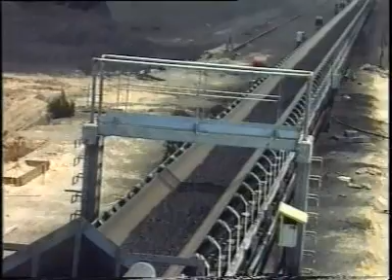Global pollution related to the production, transportation, and burning of fossil and nuclear fuels is destroying the world's ecological balance. CO2, SO2, and other pollutants caused by the burning of fossil fuels, such as oil, gas, and coal, are the primary causes of acid rain production and global warming.

Estimates show that by the year 2010, the global demand for electric energy will increase by more than 25%. Unless a new non-polluting energy source is developed, this huge global demand will be met by the construction of additional fossil fuel and nuclear power plants, which will further pollute and endanger the planet.

Here at the Technion, Israel's Institute of Technology for Teaching, Research and Development, which is the Israeli equivalent to MIT, a select team of scientists headed by Professor Dan Zaslavsky, former chief scientist of the Israeli Ministry of Energy and former water commissioner for the State of Israel, has developed a revolutionary solution that will meet the world demands for future electrical power with a new, non-polluting energy resource. The solution, which can produce power on a massive scale, is called the Energy Towers.

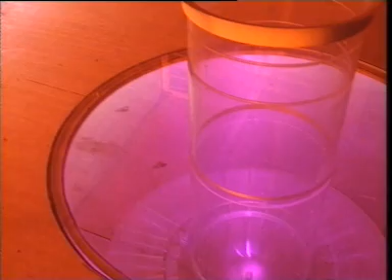The idea for this new power source was first introduced in the early 1970s in a patent by Dr. Philip Carlson, a US physicist. Seeing the tremendous potential of this new idea, the Technion team worked many years developing the technology. The Energy Towers concept that emerged from the Technion research is to build a non-polluting power plant that produces electricity in large quantities and at a low price, utilizing virtually unlimited fuel: hot, dry air, and seawater.

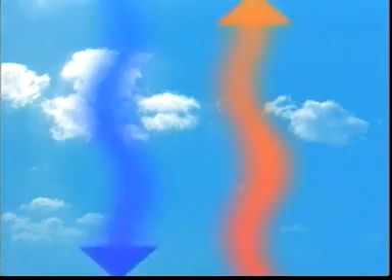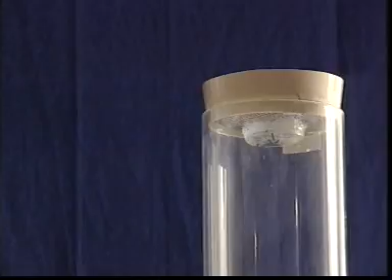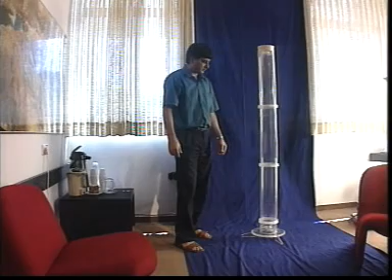The Energy Towers concept is based on a very well-known physical principle in which hot air rises and cold air falls. To demonstrate this principle, we use a small tube and put dry ice at its top. In this model, the dry ice cools the air. The cold air descends and rotates a small propeller at the bottom of this tube. In the Energy Towers, seawater cools the hot, dry air, and the cold air falls and rotates turbines.

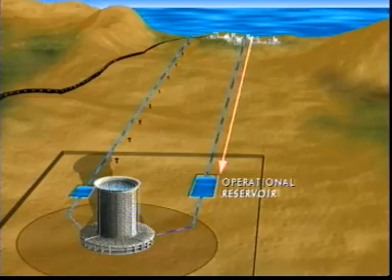The Energy Towers will be located in a hot, dry area near a large water source, such as an ocean or a sea. The seawater is delivered by pipes or canal to the operational reservoir, and then pumped to the top of the tower. There, the water is sprayed in small droplets by a spraying system into the hot, dry air, evaporating and cooling the air. As the air cools, it falls and gains high velocity.

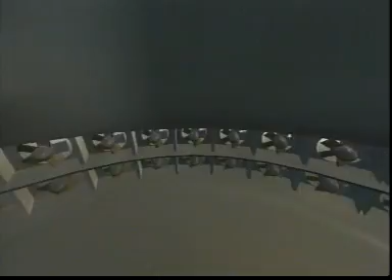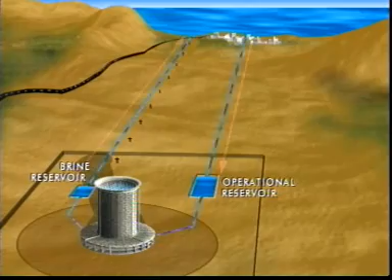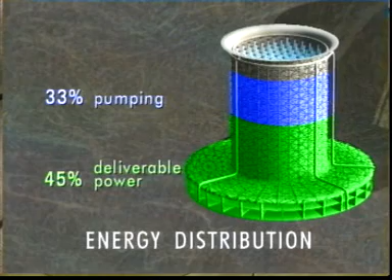The wind speed can reach 50 miles or 80 kilometers per hour, rotating turbines located at the bottom of the tower and producing electricity. The brine residue is collected and stored in the brine reservoir, and from there it is conveyed by pipe back to the sea. 45% of the energy produced in this process is deliverable as electrical power. 33% is used for water pumping to the top of the tower, and the remaining 22% are energy losses.

Such an energy tower can provide a city of around 1 million residents with all its electricity needs, which is equivalent to 460 megawatts average annual production. To achieve this energy production, the energy tower dimensions must be approximately 1,200 meters in height and 400 meters in diameter. The reason for building the energy tower plant so high is that the production of net deliverable power increases significantly as the tower height increases.

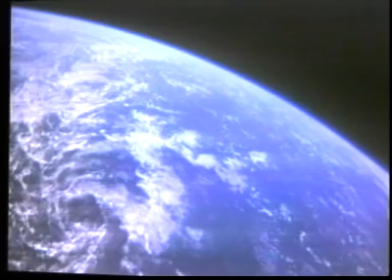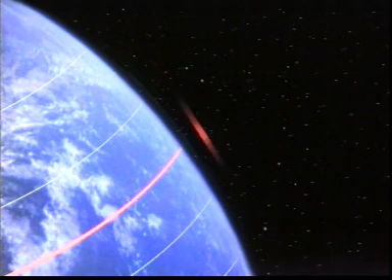The principle behind the energy towers is to exploit a well-known global meteorological phenomenon called the Hadley cell circulation. The Hadley cell circulation is a natural huge heat machine that transfers energy from the equator to the desert areas of the world. The circulation begins when hot, humid air rises from the equator. As it ascends, it becomes cool and dry by shedding rain. This dry air later travels north and south and descends towards two belts.

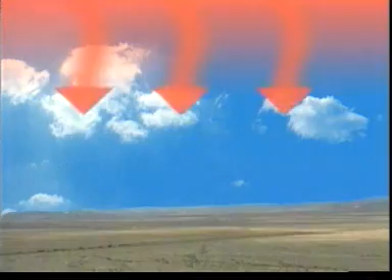As it descends towards the ground, it is compressed and becomes very hot and dry. This is how the Earth's large deserts and arid regions are created. This air flows back towards the equator, and the process repeats itself. The Energy Towers operation is based on harvesting this hot, dry air as it descends above the desert regions. It flows day and night, and thus allows the Energy Towers to operate continuously, unlike all other solar energy facilities that produce energy only during sunshine hours.

In comparison to tall building structures existing today around the world, such as the Sears Tower in Chicago and the Twin Towers in New York, the Energy Tower's height will be more than twice the height of these structures. The Energy Towers project in its entirety is based on well-known, proven existing technologies.

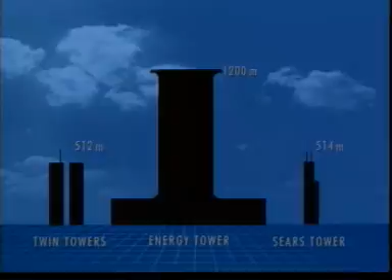The government of Israel was deeply impressed by the prospect of this project. It formed a committee of experts to examine the project, and their verdict was that this project can be built entirely from well-known, proven existing technologies, and it encouraged the government to support this project to fruition.

The committee was convinced of the qualitative correctness of the physics on which the Energy Towers idea is based. An advanced analysis by Professor Yair Tena reflects a reasonable initial cost, though somewhat higher than estimated by Zaslavsky's team. The analysis points out clear economical advantages to the Energy Towers program.

The Israeli Electric Corporation, the national electric utility that supplies all Israel's electric needs, saw it as a revolutionary, innovative idea.

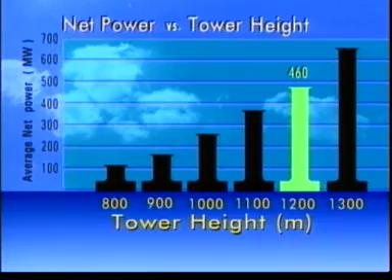The output calculations were examined and confirmed by several independent groups of experts, among them the Computational Fluid Dynamics Software Limited Corporation and the Israeli Electric Corporation. The calculations regarding the average net output of 460 megawatts, with its corresponding 400-meter diameter and 1.2-kilometer height, are the results of extensive research, tests, and simulations made by the development team at the Technion.

We calculated the output in many ways, probably 6 different ways. And we were not satisfied until we got the same results in all of them. And it wasn't done only by us, it was done by different people using different methods, and we made a point of it that over a range of parameters, all of us will get the same results.

But that's not enough. We ran experiments. We had wind tunnel models, and we had also a 5-story building chimney where we could run experiments, and we actually ran hundreds of experiments. And we can say in certainty today that we didn't forget to divide by 2 or multiply by 7. Our accuracy today is probably plus minus 10% in estimating the output. And there's absolute certainty about it.

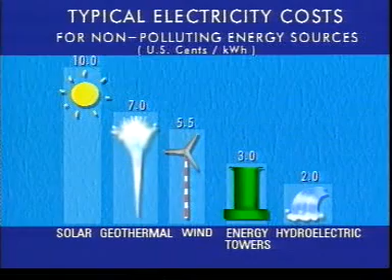In comparison to other non-polluting energy sources such as solar, geothermal, wind, and hydroelectric power, the Energy Tower is only slightly more expensive than hydroelectric power and far less costly than wind, geothermal, and solar power. One must remember that the Energy Tower's global potential far exceeds the combined output projections for all the other forms of non-polluting energy production.

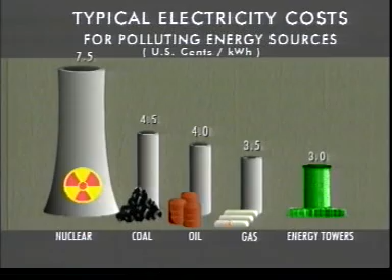In comparison to other polluting energy sources such as nuclear, coal, oil, and gas, the energy produced by the Energy Towers is not only renewable and clean, but also cheap. As the height of the tower increases, the electricity cost decreases significantly, and this is the reason for a tall structure.

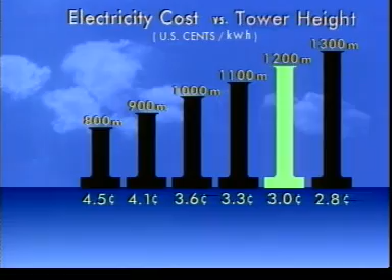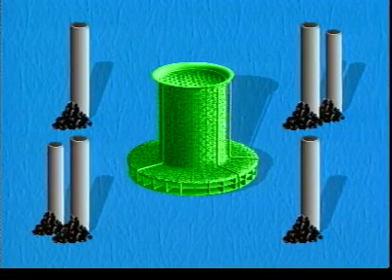The Israeli Electric Corporation examined the possibility of incorporating one energy tower with an average output of 460 megawatts in their long-term planning computer model for future power plant construction. They found that by incorporating one energy tower in an optimal coal-based plan, the expected cost saving would be $1.1 billion.

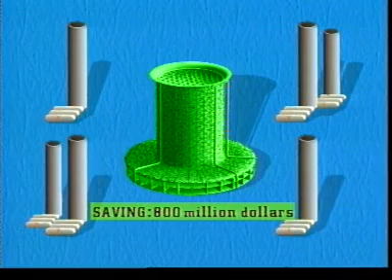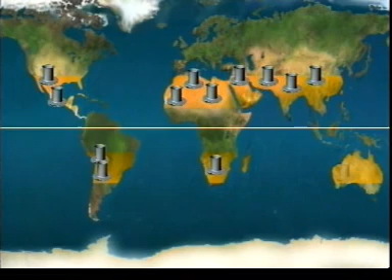By incorporating one energy tower in an optimal gas-based plan, the expected cost saving would be $800 million. There are over 40 countries in the world with desert regions that can benefit from the Hadley cell circulation. These countries can build energy towers and receive clean, non-polluting, inexpensive power. Most of them will be able to export electricity to neighboring regions.

The theoretical potential that exists for the energy towers is to supply approximately 20 times the current world consumption of electricity. In practical terms, in the majority of arid countries, approximately 50% of the electricity can be provided in the near future by the energy towers.

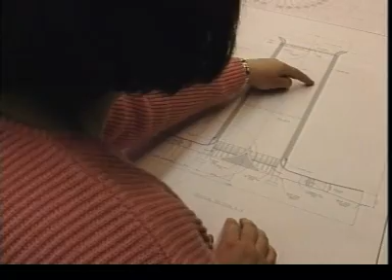The energy towers are a revolutionary idea in that they can produce large amounts of power with no pollution. Potential side effects have all been carefully studied, and technical and engineering solutions have been developed to ensure that the surrounding environment is protected. The main environmental concern was the potential for salt spray drift. Utilizing proprietary technology, almost all the brine residue from the water spray will be collected in the tower and in the diffusers.

The balance of the salt spray drift will be contained and collected in an area surrounding the power plant, especially designed and engineered for that purpose. The collected water is stored in the brine reservoir, and from there it is conveyed by pipe to a controlled disposal system back to the sea. That is how the problem is solved and the environment protected.

The absolute thing is that there will be more power stations. And unless we have such a method, there will be more fuel burned. And the question is, do we want another power station that will pollute the air? And the answer is pretty obvious.

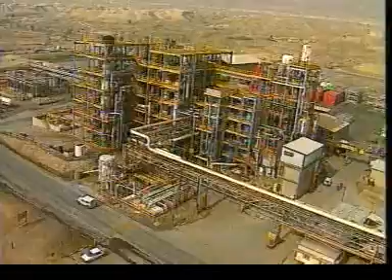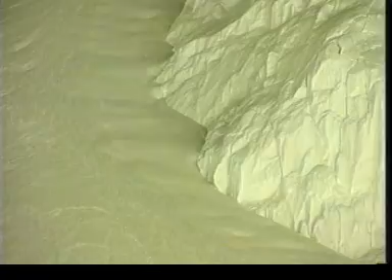There are several major additional benefits to the project. Desalination of large quantities of seawater at approximately 2/3 the price that exists today. One energy tower can provide fresh, clean water to a city of 1 million residents. Inexpensive desalination will also create community, industrial, and desert agriculture development. Additional facilities can be developed for low-cost salt production, and relatively inexpensive inland ponds can be dedicated to farming sea fish and mariculture products.

The first countries to build energy towers, which will be the tallest man-made structures on the planet, will benefit from increased tourism and national prestige. And many countries that are not rich in fossil fuels will reap the additional benefits of not having to spend hard currency to import these fuels.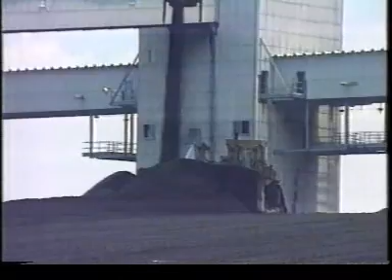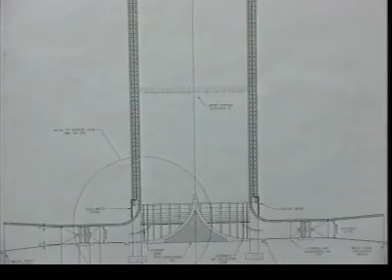The major portion of the research and development phase of the project has been completed. Today, it is at the engineering and construction phase, where a pilot plant is about to be constructed in the Arava Valley, south of the Dead Sea. The pilot plant will be approximately 200 meters in height and 50 meters in diameter. Once the pilot plant is constructed and successfully operated, it will lead to the construction of a commercial power plant.

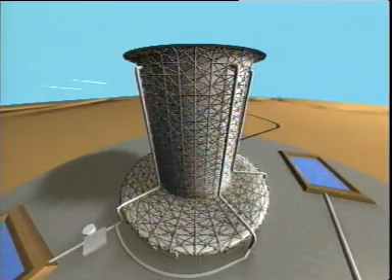We believe that the Energy Towers project has a great potential that should not be overlooked, and that this project must be realized. As the national power company, we will join the pilot project at the first stage, and later, if it proves itself, I hope we will also take part in the commercial stage, so we can produce energy from this technology.

Energy towers that Professor Zaslavsky and his team are trying to develop is in fact the most promising way to convert on a large scale solar energy into electrical energy. And I believe if this project is going to prove itself economically when it will be realized, we may be making a major contribution not only to the economy of the State of Israel, but to the welfare of human beings all over.

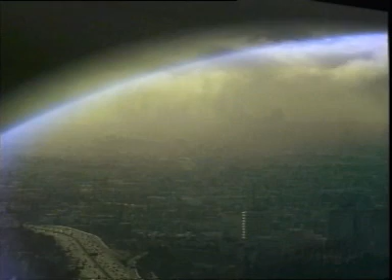The energy towers are a first, bold, and serious step of modern society to reverse the ecological damage caused to planet Earth from the exploitation of energy resources. Global energy needs will increase manifold during the 21st century. The energy towers, with their almost unlimited potential to create clean, renewable power, can participate in meeting these needs while protecting our planet.